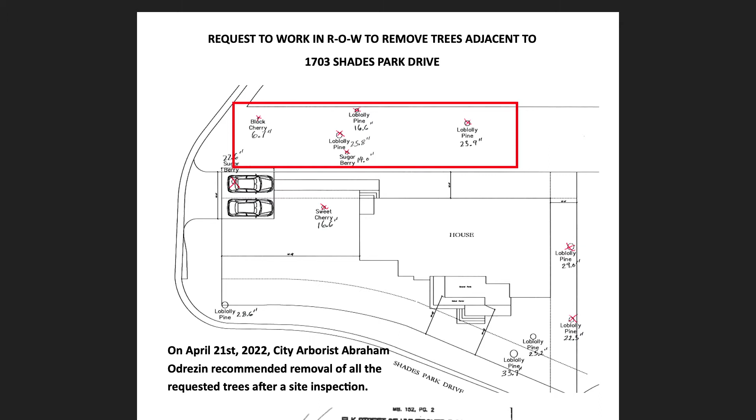We've talked to all the neighbors and they're fine with it. The city arborist came out and he was fine with it too. Happy to answer any questions. Did he say why, some explanation for why it's needed, whether the trees were diseased or not? He didn't give us any elaborate explanation—he just sent me an email stating he approved removal of the trees.

And visually, what's in that red section right now—is that the alley? Yeah, it's an alley. There's a fence that the neighbor put up, just shrubs and things like that. There's really nothing in that area at all.

And the cost of the removal, I guess, is on us—going to you guys. Yeah. I guess it's city right of way, so just removal of the trees, nothing really to fix up in the alleyway, just to get them out of there. That's correct.

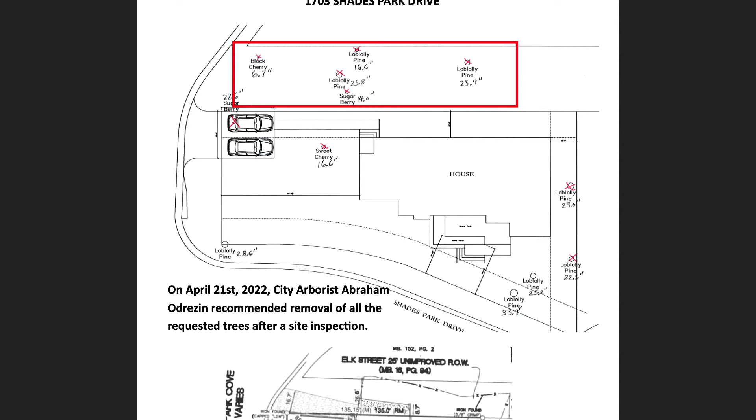I'll make a motion to approve the removal of the trees with proper indemnification documents. Motion by Councilor Hardin. Any questions? I'll second.

I do have a follow-up question—just for clarification, after the trees are removed, did the city arborist recommend any replanting anywhere else on the site? As part of the building permit, we will have to satisfy the tree ordinance for the building permit on the site.

It would not require plantings in the city right of way, because of course it's not a right of way to plant in. But yeah, we have to meet all the tree ordinances for the construction.

Perfect, okay. Another quick question—there's a couple other pines back over here, off to the side, not in the red area. Correct, those are on his property. A couple of those were approved earlier, actually there were 4 of them.

So two have red X's on them—those 2 have already been removed, that permit's been received. And then the 2 down closer to the roadway, those are staying for now.

I think his plan is to keep all those trees, and then we'll plant additional trees as well.

So we had a motion by Councilor Hardin, a second by Councilor Nelms. All in favor? Aye. Any opposed? 4-0, Ms. Salter—so it'll go to full council next week at 6 o'clock. Sounds good, thank you.

030522, request for work in the city right of way to tap storm infrastructure at 305 Morris Boulevard into the city storm inlet. Willow Holmes and Cale Smith.

I'll just talk real quick and Jason can fill in whatever he wants. Basically, we're just gonna collect all of the downspouts and pipe them to the inlet. So the question is, can he tie into this inlet right here?

Is this the same house we talked about? No, no. You were here a couple weeks ago though. Yeah, different property. Okay, that's what I thought—different project, yeah.

I think there might be—did I send you a picture, the screenshot of the inlet itself? So if we don't tie into it, it's still gonna sheet drain down to the street anyway, right?

No, it's not. So, you see it sits on the property here—if he just splashes on grade with those downspouts, he's gonna create adverse effects here and on the neighbors here. It's gonna create significant issues. At some point it's gonna rain, and after it flows through their crawl space, they'll call me like 25 times.

No, I mean, I like the idea—I'm speaking in favor of what's happening. So he's just gonna collect all of that and pipe it to the inlet. It's right, the inlet's right behind this car, but it's just a regular grade. And the reason he's coming to us is because it's in our right of way.

Will it be underground? Yeah, everything's gonna be run underground to get to it. No adverse effects that we know of from doing that. Putting a 5-inch gutter on there—6 inch, most of them are 6. 4 doesn't work, I'll just tell y'all.

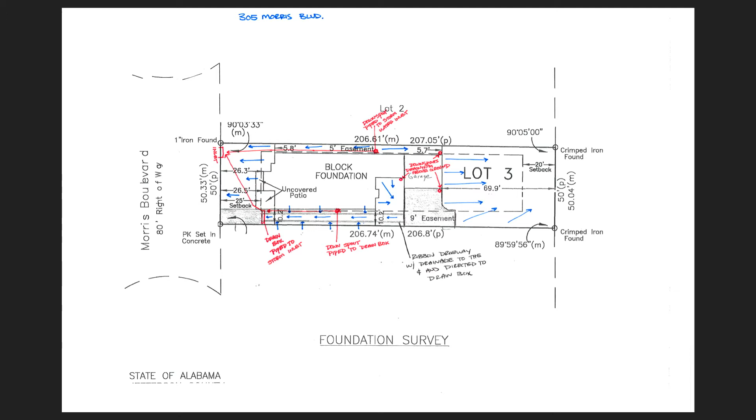So it meets the current ordinance, and it's not like all the water from the site is going through the inlet. Half of it goes back here, and all this is grass, so it will go a lot more slowly back to the alley than it will up here. This is a 206-foot deep lot, a little bigger than normal, so that backyard is sizable and it naturally already drained there. I think we're actually improving from what was there before, since there was a huge amount of concrete back there.

By gathering this, I think we're probably improving the neighbor's situation from before. Jason and I met out there a couple weeks ago, and the biggest concern wasn't what's happening in our pipes downstream, but how we prevent the folks to the north and south of them from getting impacted with stormwater. We looked at a curb option and a couple other things, but this seems to be the best solution. That's a ribbon driveway too, so that whole stretch is just two ribbons of concrete with grass in between, so we tried to slow the water down through that as well.

So you're gonna tie into the box? Yes. Just a follow-up to what you said about it not being so much about what's happening with the volume downstream, because my concern is flooding downstream, and that's why I was thinking this all ultimately impacts that when you have Griffin and Shades joining, and then flooding. You're absolutely correct on all of those things.

But again, here it all used to go to this point. Some of it used to go to the back, and some to the front — most of it used to go to the front, I think. We're taking half of it and sending half to the back and half to the front. I think lot by lot, if we can make improvements, that's great, so thanks for the thoughtful consideration of doing that.

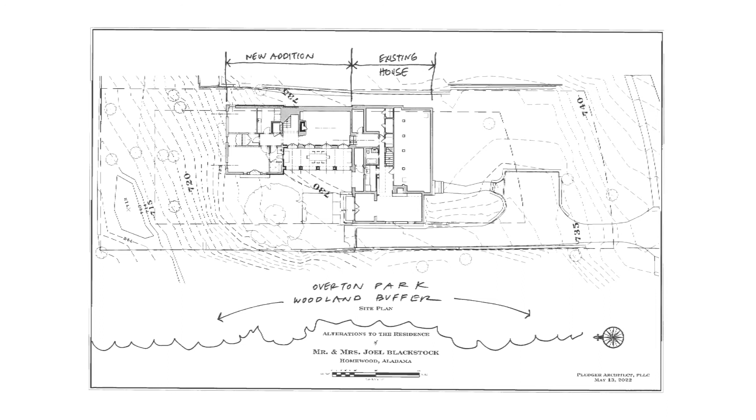This shows the existing survey and topography. We abut Overton Park, but there's about a 50 or 60 yard band of woodland area that's rough and overgrown, and then the park opens up down there with the pathway. This is the existing house, and we're adding the addition here, and the grade slopes down quite a bit, so this digs into the hill, and the basement would open up and daylight on this side. We have a good bit of dirt here, so if we could go to the next slide.

We're trying to optimize our yard here, taking the dirt from here and putting it there, and we're asking for permission to do a little grading to tie the grades in on the park side. You can see when this house was built, that's pretty much what they did—they sloped out into the park. We're carrying that with the dirt just a little flatter, and they need to grade that out. It would just be tapered straight down at a 2-to-1 slope, or even 1-to-1.

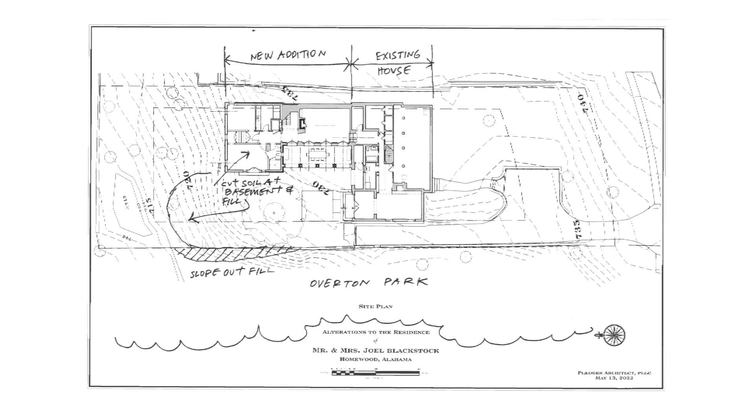And from that standpoint too, in other situations where people worked in the right of way, we've created some parameters for the dimension for the work to be contained within. Could we not do the same in the exhibit to this?

Absolutely. I don't think you'll get more than about 15 feet. Or probably allow them up to 20 feet to allow them to get in there and be able to work. That'd give you plenty enough room. If you could do that, it'd be great, but I don't think you'll go that far. 20 feet would just give you enough room to work, give some license in that area.

So I guess, Mike, do we just need to have that added to it? If you can put on the exhibit, make grading improvements to the Overton Park right of way, not to exceed 20 feet. Okay, that sounds great.

I'll make a motion to grant the request to permit grading work in the right of way, with proper identification and all that. Motion by Councilor Nelms. Second by Councilor Sims. All in favor? Aye. Any opposed? 4-0, and we stand adjourned.